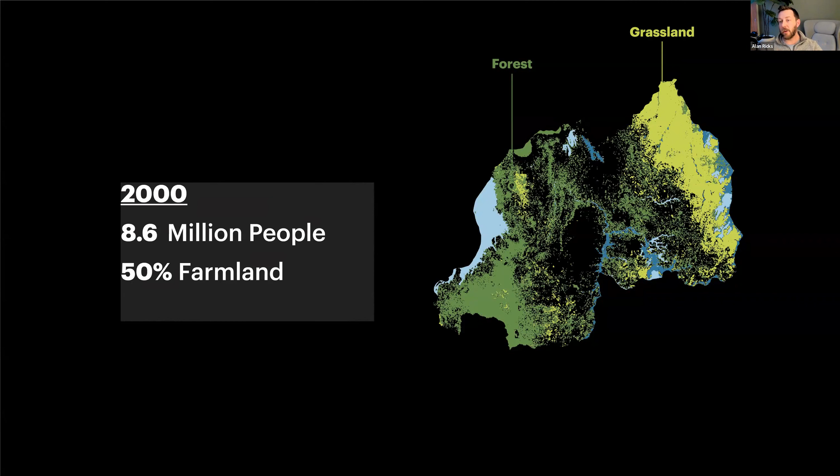This is all positioned within a radical change in the country of Rwanda. In 1965, you had 4.6 million people, and most of the land was forest and grassland. By 2000, the population had doubled, with significant transformation of land use into agricultural production. By 2019, it's 12.8 million people, and 80% of the land is now focused on food production.

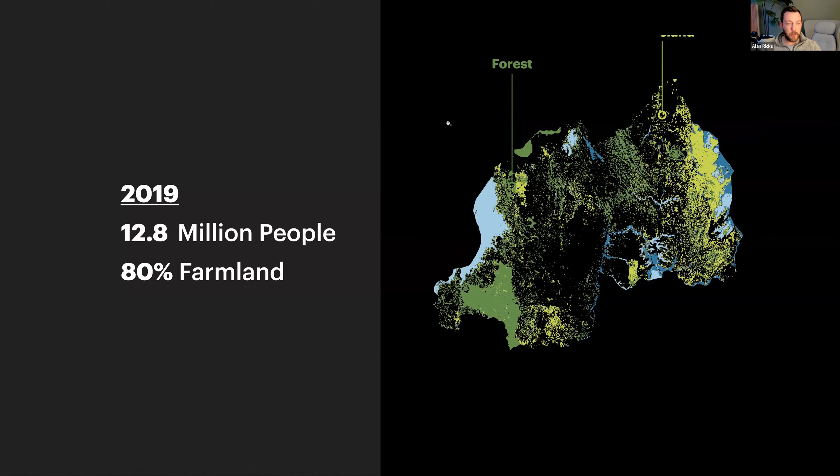This is only going to continue. The population is expected to double again by 2050. You have a population that's already about 20% food insecure. So here you have this pending crisis where we have to figure out how to produce more food more sustainably to support this population. And yet we're looking at also having to cope with some of the negative impacts of this type of land use change.

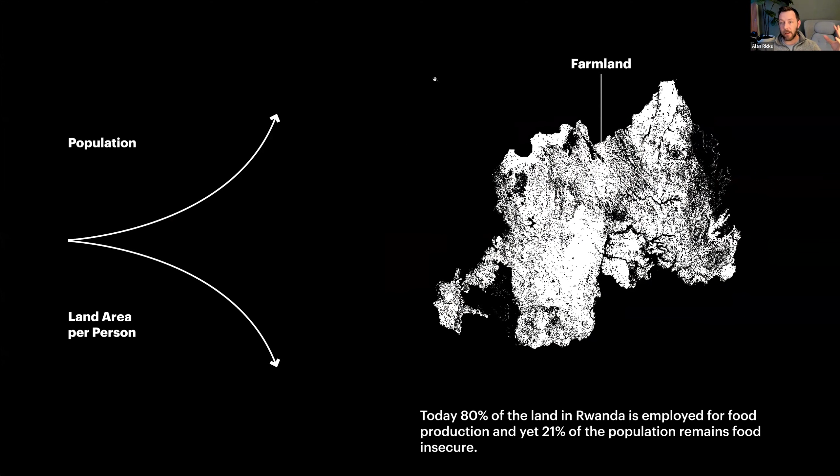So you're seeing clearing of forests and grasslands to make way for farming and grazing. That's leading to erosion. You've removed a lot of the wetlands to give livestock access to water, so you're having more of that erosion find its way into the lakes, causing soil degradation. Because of this, the great crowned crane has left these areas.

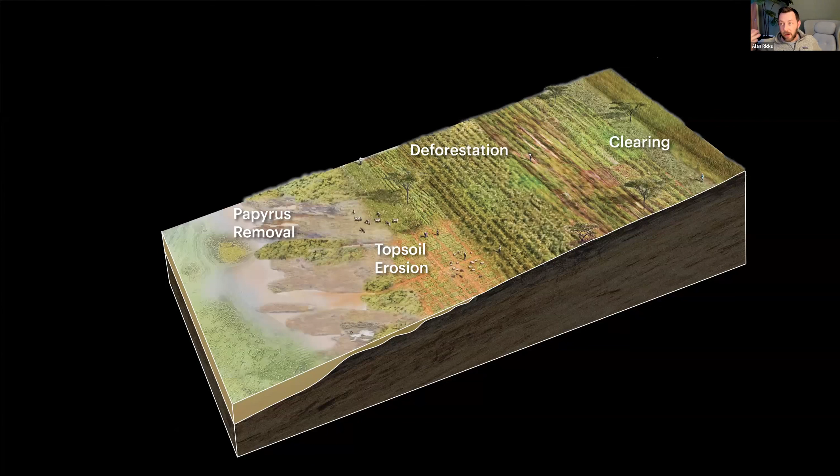The cranes and other birds help keep insect populations in balance, so now you're having more infestations of crops. You're also seeing overarching climate change shifting the malarial line up in elevation, so you're having increased incidence of malaria due to the prevalence of mosquito populations.

So here you see this vicious cycle of short-term land use focused on food production actually having long-term negative impacts on overall population health. And so what we see is a siloed approach to land use, when what we need is an intertwined approach that holds in mind human, animal, and ecologic systems, understanding that they're intertwined.

People talk about this as a kind of One Health strategy that looks at how we can leverage those interrelationships to address issues like food crises, and we've seen that it's possible with approaches like agroforestry to actually improve overall yield production while being able to preserve biodiversity.

So you're looking at a movement away from the typical monocrop production we're familiar with, the giant crop circles you see flying over the Midwest, towards a One Health strategy that looks at more interweaving of native species in with food production.

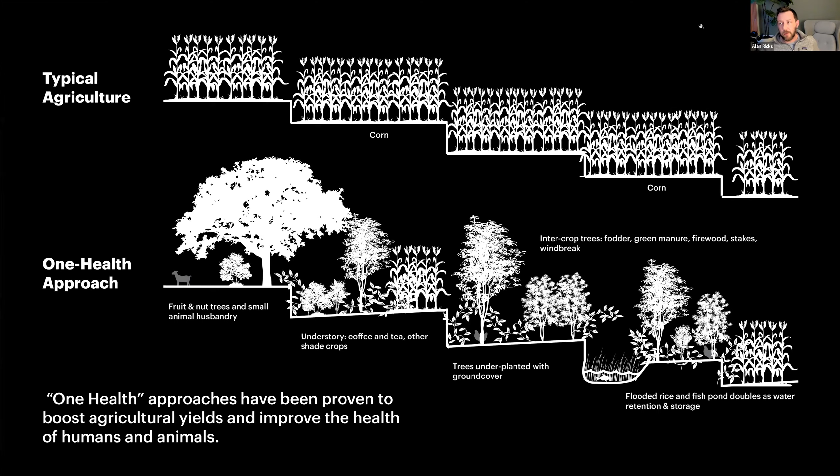We went in and with an ecologist actually created a map of the whole taxonomy of the ecology of this area. There are 2 endangered bird species there. You had large cats, wild cats that aren't seen many other places, but an incredibly rich number of flora and fauna species.

And then we started to look at this over a long time horizon. What would it take to bring back the great crowned crane and other types of apex species that have migrated away as the land use has changed, and really focusing on introducing some of these establishment crops that could help set the table for the reintroduction of other species over time.

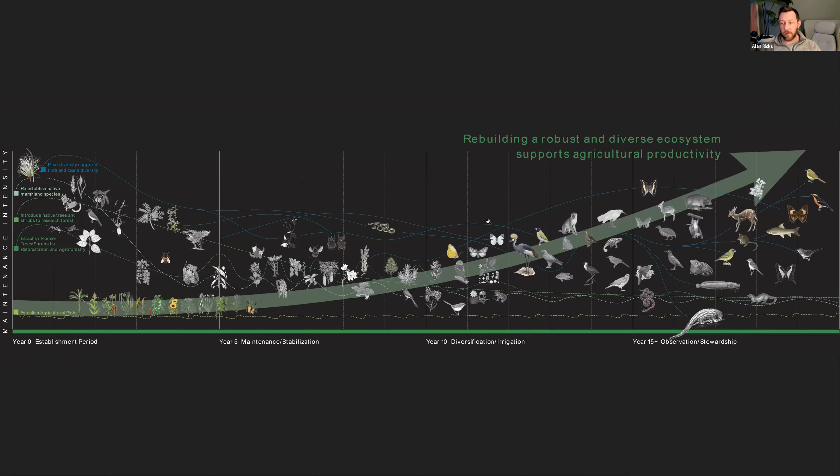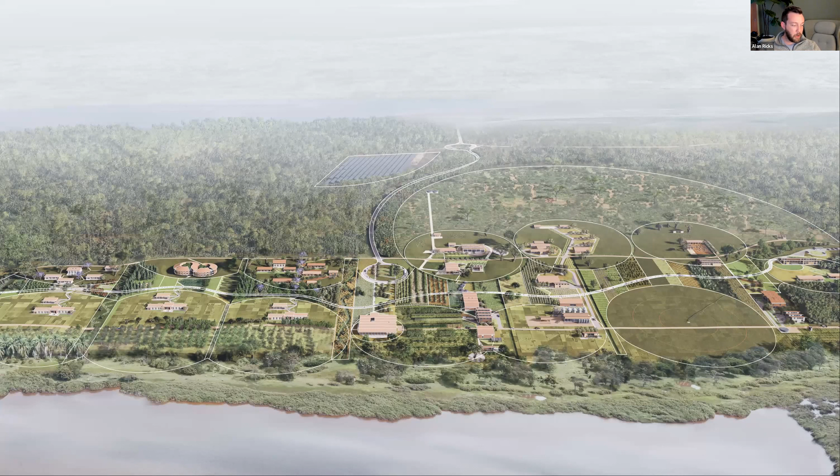And then that really plays out into the overall master planning of this site, where we're looking at balancing an array of decisions while also building the Rwanda Institute for Conservation Agriculture. So trying to actually show that agricultural food production can coexist alongside conservation efforts.

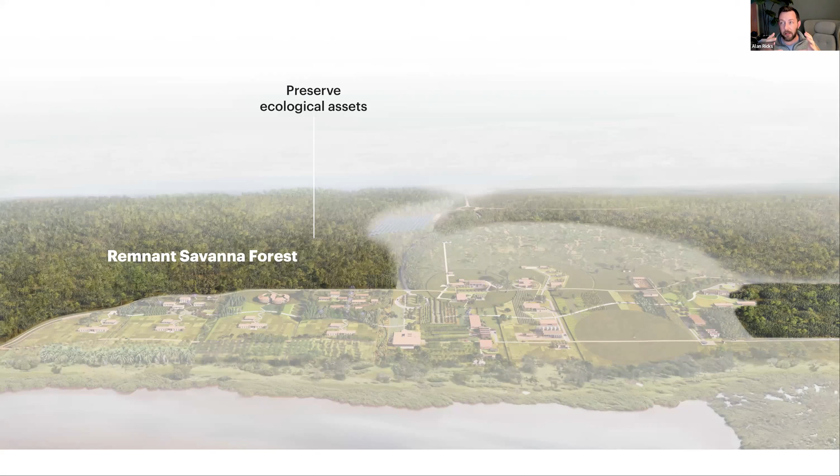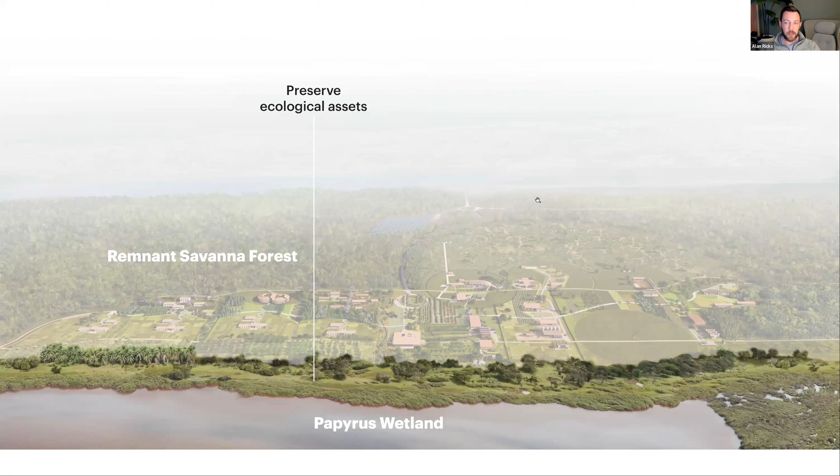So it starts with preserving the remnants of the forest and actually removing roads that were cutting through it to try and maintain the size of that patch. Then also looking at setbacks from the lakes to keep the papyrus wetland intact. And then looking through the rest of the site to understand what is optimized based on soil conditions for food production, for grazing, for other components.

We looked at a pedagogical approach to an immersive experience where the first year students live on smallholder farms. In groups of 21 students, there's 8 groups of 21 first-year students. They live in these dorms and they farm the area around them and have to figure out how to sustainably manage that. And they can bring in some livestock.

They can focus on crop growth. They're actually looking at how that then is utilized for campus dining.

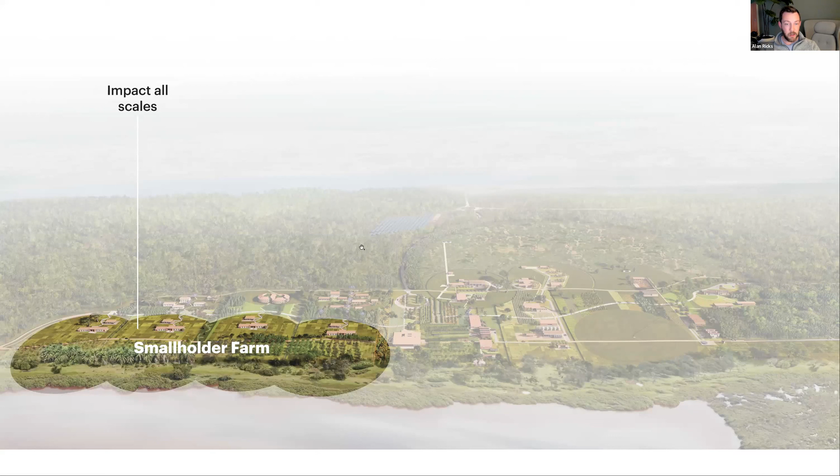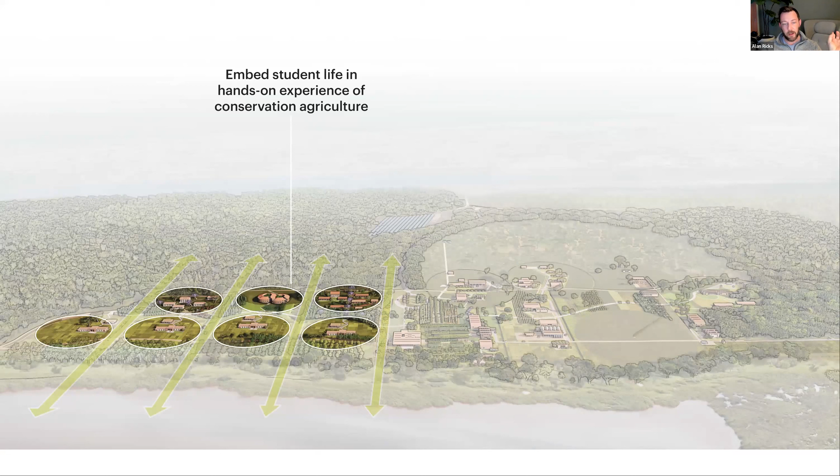So on one end of the spectrum is the kind of student life immersive experience. We have the first year students, second and third year students are in this kind of figure 8 building, faculty housing. And then I'm going to zoom into that first year farm a little bit.

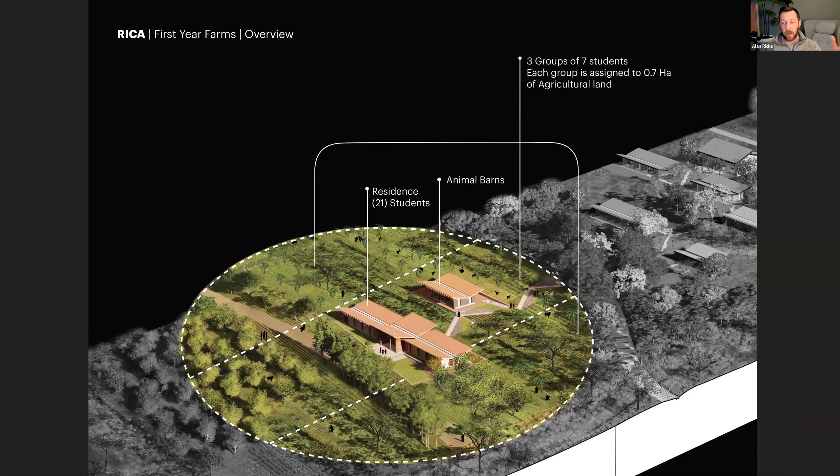So really, we're looking at how can we be responsive to the place. Again, looking at the resources that are available. Some very simple, straightforward, passive moves. The buildings are oriented due east-west. This is very close to the equator, so north and south exposure are more or less the same at different times of year.

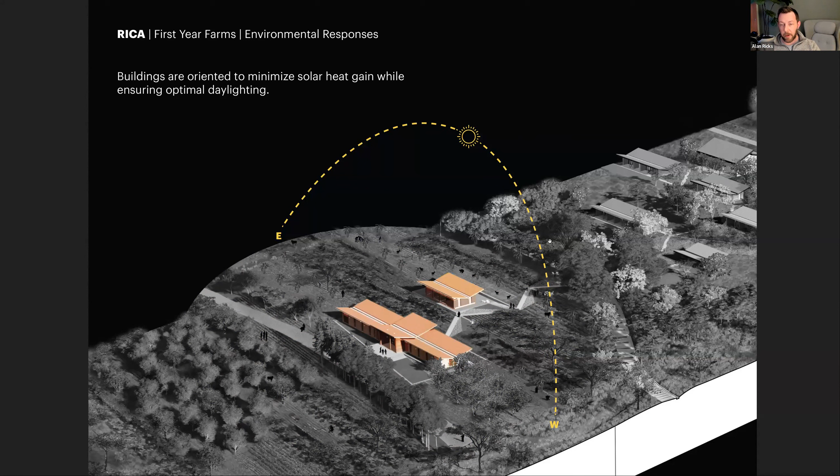So we have these butterfly roofs that we can use to collect rainwater with large eaves for shading those facades and really minimizing the east and west exposure.

The buildings are built with earthen construction, so a mix of compressed earth blocks and rammed earth for the wall systems. We're looking at timber structure for all the roof systems, which is actually pretty rare in Rwanda. Typically you're looking at concrete or steel that's all imported, and obviously you might think there's a kind of inherent friction with deforestation and the use of timber systems.

But we did a lot of work looking at the different supply chains and found some of the emerging sustainable forestry practices that were happening. A company that was coming out looking at sustainably harvesting within the edges of one of the national parks, and then looking outside of Rwanda in places like Tanzania for tree farms and other things to understand what exact timber species we wanted to use for the different types of systems that were being developed.

We worked with a local terracotta manufacturer that was using agricultural waste to fire the products for the roof tiles.

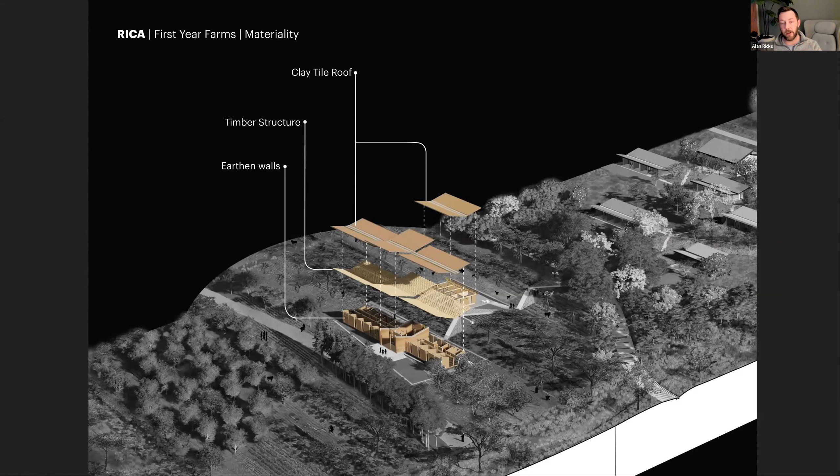On the other end of the campus, we have the core academic buildings that we call the enterprises, focused on different specialties within the agricultural system. So you're looking at dairy, tree crops, row crops, poultry, swine, ruminants—all these different components of the education, each with their own buildings.

We wanted to do something different in the massing and how these buildings sit on the site. They run north-south so they act as stitches reaching out into the landscape where the actual work is happening. For dairy, they reach out into the grazing land, but ultimately they all plug back into the central spine, where the end of the chain happens—cows grazing in the field, then the milking parlor, then an area for making value-added products like yogurt. That component plugs into the spine. This was driven by the location on site.

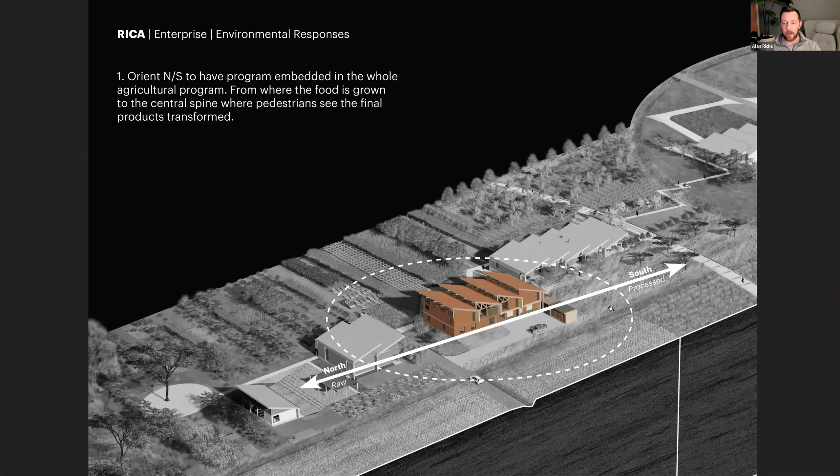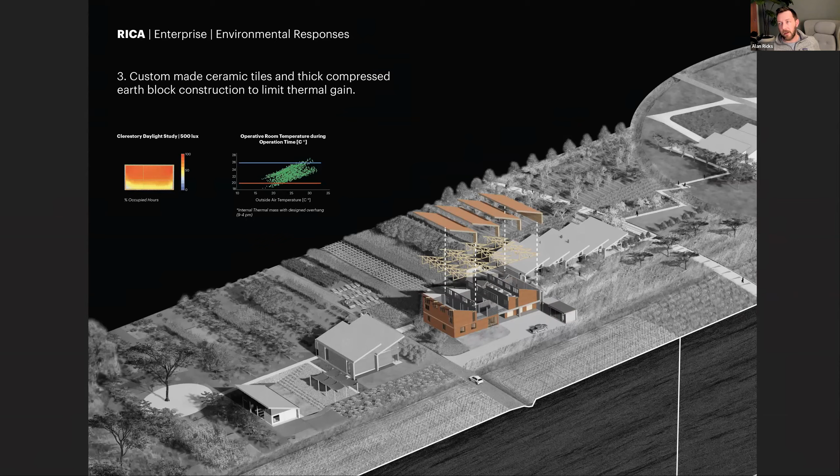The design also had to adapt based on solar exposure. In this case, we're using a sawtooth design, keeping most of the glazing on the north or south side, and keeping the east and west facades with high, dense thermal mass and few openings. There was a lot of analysis into maintaining comfort in a fairly hot zone, with passively ventilated systems, working with our frequent collaborators at TransSolar on the environmental design.

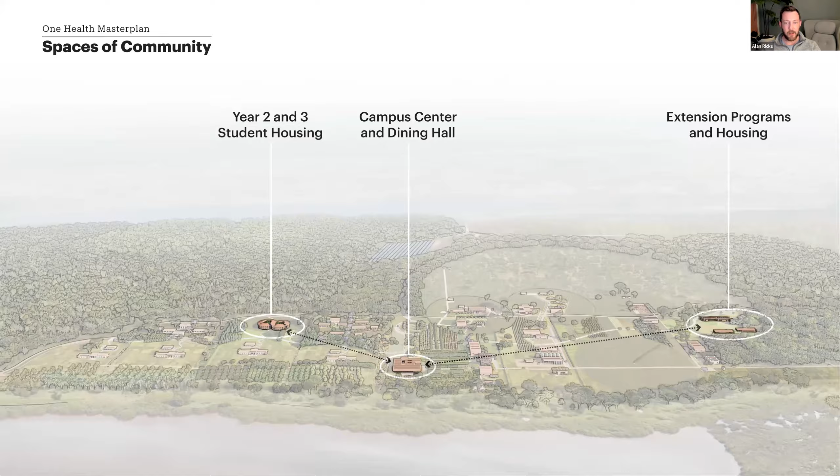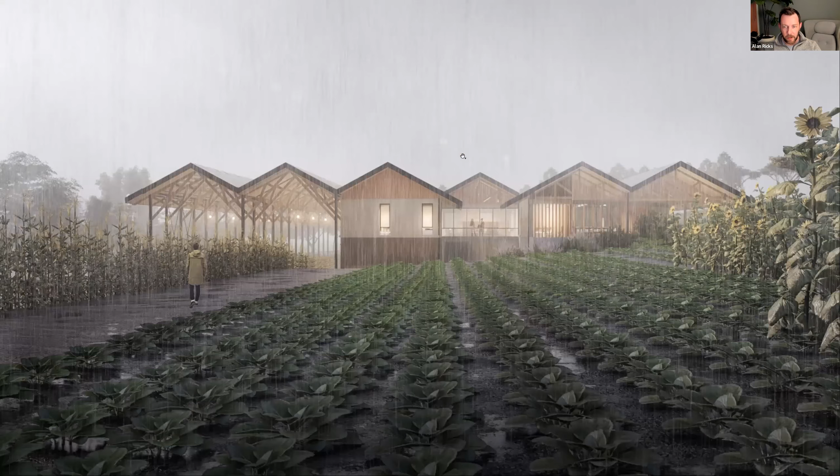There are a few more social buildings that are differentiated in terms of design. You have the campus center, the heart of the campus, with the dining hall—the literal farm-to-table experience, if you will—but with very similar principles deployed here.

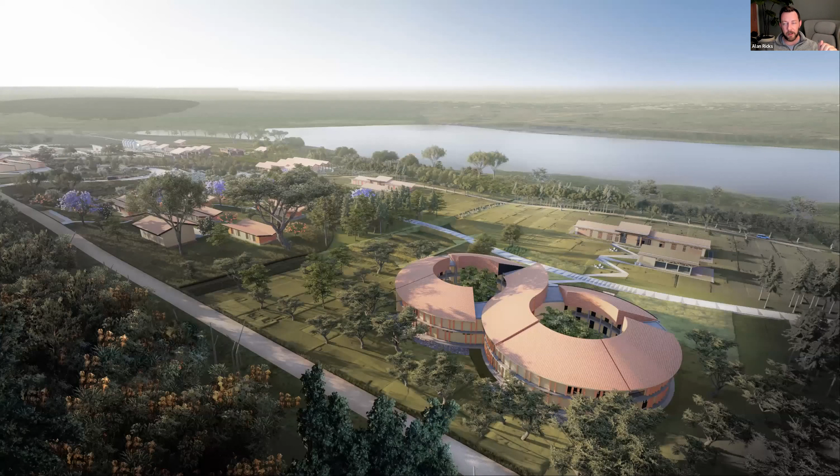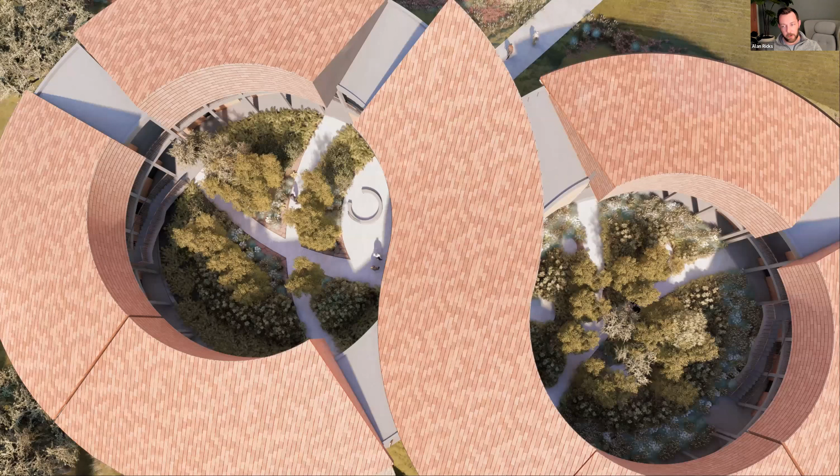Then we have the second and third year dorm, this figure-8 building, with a men's and women's side. At this point in the curriculum, students have started to specialize into different enterprise areas, so we created space for them to come together—two courtyard spaces, as well as a shared lounge space at the intersection.

We also did a lot of the tile work, working with a ceramicist named Walaris, often described as the godfather of ceramics in the country, who works out of his house in a remote village developing these glazes using a lot of local materials.

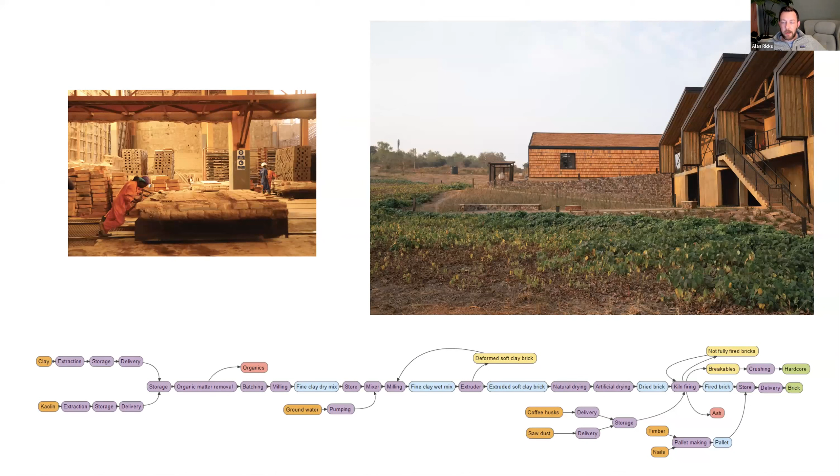Wood, we're having to actually understand all the different wood species that are available, what can be sustainably harvested, but also looking at it through its ecological value. What are the things we want to promote in reforestation?

Much of the country, in dealing with deforestation, has looked at using eucalyptus as a reforestation strategy, which is not a native species here. It requires a lot of water, grows fast - that's why it's desired.

But we started looking at what are the kind of native species that could both contribute to rebuilding the biodiversity of the place, but also would have uses in the marketplace - whether for structure or for furniture production.

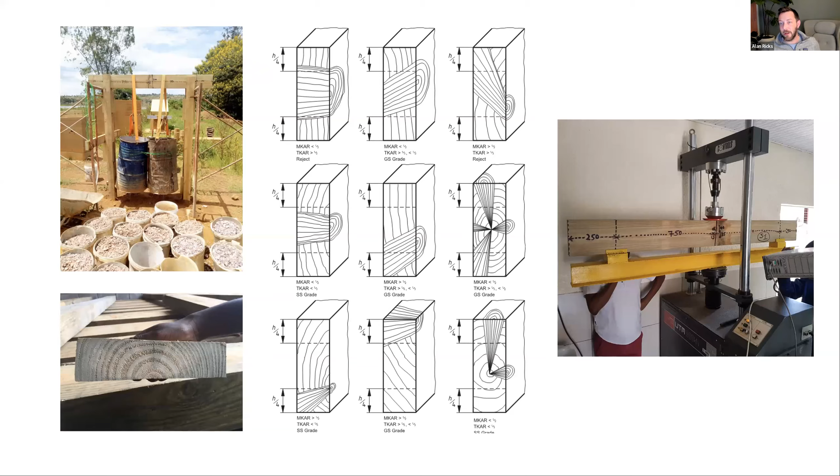So looking at this through a range of scales, actually mapping our procurement where, like, 95% of the material by mass is coming from within a very small geographic zone.

There are high embodied carbon, long transportation things like the solar array and the wastewater treatment plant coming in, but some of the fundamental decisions made around using stone foundations instead of reinforced concrete, the earthen walls, wood roof systems instead of concrete or steel, are allowing us to reduce the embodied carbon relative to global standard institutional buildings.

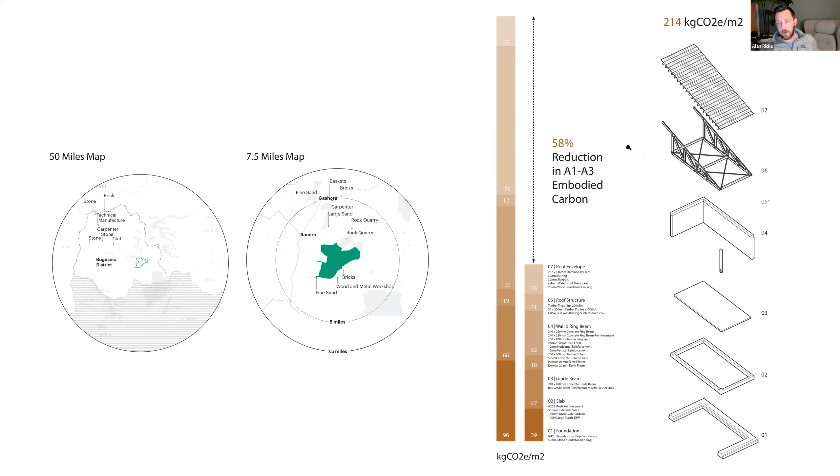And that's probably all kind of familiar topics or content for y'all.

But the last thing I'll mention is on this idea of the regenerative piece. So no matter how much we're able to do in terms of more efficiently building with low embodied carbon materials, everything is off grid here - energy production, the water system, wastewater treatment - it's still inherently extractive.

And so we have to look at landscape strategies as ways to actually get to a climate positive solution. In this case, we have a lot of land area, so that's a huge resource to look at from a sequestration standpoint - looking at the landscape strategy, reforestation strategies, and soil as opportunities for sequestration.

Our projections have improved a little bit to think that we would get to carbon neutral in under a decade. We've been working with Atelier 10 to help us do some of that analysis, particularly around understanding more about carbon sequestration in soil.